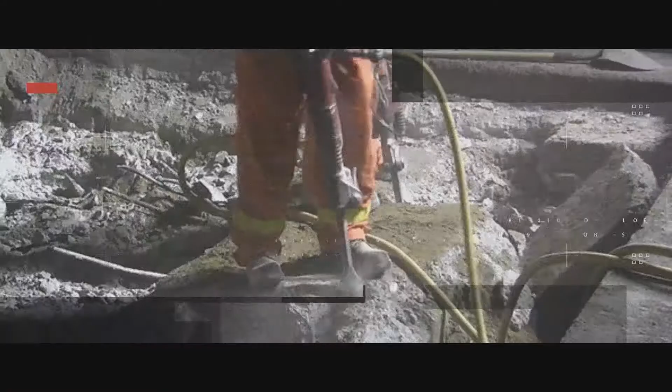But what are these frustrations? We will show you in the next video, which we will play and I will comment. Diamond coring, if we look at the coring express, is one of the most dangerous machines in the world. If the clutch fails, we face serious injuries by the user, kicking off a ladder, for example, or even worse. When we look at demolition hammers, we know the hassle of cords, the hassle of hoses. Guys have to maneuver 30 kilos of weight and sometimes even petrol. This brings us to the next point, petrol engines, a lot of parts, sometimes hard to start due to weather conditions. And then, if this is not enough, fuel storage, fuel transportation, fuel handling, having the right mix, and then at the end, the emission.

What you see here in this video was original footage from research this team did, and we really try to tackle these kinds of frustrations with a new breakthrough technology and bring it to you into these markets. In order to bring you closer to what zero emission means and how we solve other issues as well, I want to hand back to Claude, who tells you more about zero emission and what it means in total.

Thank you, Thorsten, for giving us hints, showing us the problems and issues we face today on site. We will go now together into our zero emission story. Of course, zero emission is a lot about fumes out of petrol engines, and it is a story about the environment. But when we speak about fumes, it is also a story about health. And health brings us to safety on site. MX Fuel, the zero emission story, is also a story of productivity and economic values. Here we will go a little bit deeper.

When we speak about zero emission, we need to speak about the fumes out of the exhaust. One story is definitely the particulate matter, SOx, NOx, and other substances. Here we hear a lot about legal issues, how regulations will change. Even here in Germany, they speak about a speed limit on our motorway. Guys, could you imagine a speed limit on the German motorway? This is one part of the story, but we also need to speak about carbon dioxide, the main reason for global warming. And here MX Fuel gives us a lot of opportunities to save carbon dioxide on site.

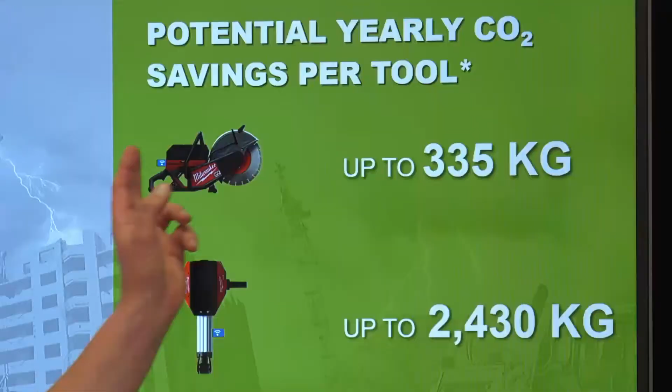The first example is our MX Fuel cut-off saw. Here we can save up to 335 kilograms of carbon dioxide per tool and year. Guys, again, per tool and year. From research, we know most companies use much more than one tool, they use 20, 25 tools within one company, so the potential savings here is really huge. On the other hand, with the breaker we can save up to 2.5 tons of carbon dioxide, again per tool and year.

The question very often is, how much is this in comparison to something we know? So we compared it with the average white van, the typical truck a craftsman here in Europe uses. We asked them during our research how many kilometers they drive over the year, and the answer was approximately 10,000, which brings a carbon dioxide footprint of 1.7 tons. So you can see, even with light building equipment, the saving potential is really huge. The reason is clear: here we use small engines, two-stroke engines, and they don't burn perfectly. This brings us directly to the health topic.

When we speak about fumes and health, there are two substances we need to understand. One is benzene. Benzene is first of all an alcohol, and it reacts in my body like every alcohol. I breathe it in, it goes in the blood, and I get a little bit drunken. And of course, I lose the fear of risks. This is the moment when accidents could happen. And on top, benzene could cause cancer, for example leukemia and other diseases.

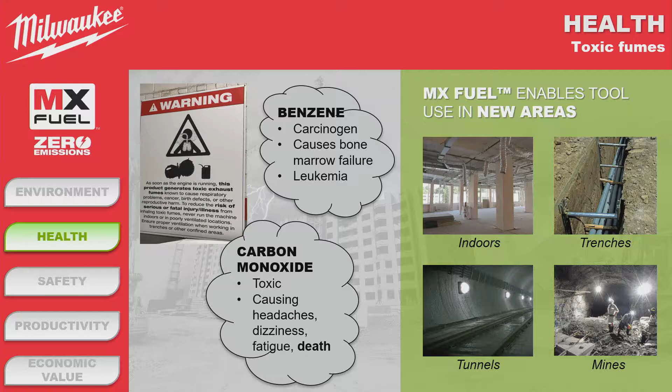The other one we need to speak about is carbon monoxide. Carbon monoxide is definitely a huge problem on site. The reason is quite simple: yes, it is toxic, but it is also heavier than air, and it could fill a room or a trench really easily. And when it goes over the nose and there's no oxygen left, the risk starts. I get a little bit of headache, get a little bit dizzy, and in the worst case it could end in a sudden death. This is the reason why we can't use petrol tools indoors or in trenches.

Here, guys, MX Fuel gives us a lot of new opportunities where we can use the tools. For example, we can easily work indoors. On research in trenches, we saw people building exhausts out of the trench. Here with MX Fuel, no job on top, just cut, job done. We can use it in tunnels or mines without any issues. Guess this is the big benefit of using MX Fuel.

Going a bit further into the health and safety aspect, we need to speak about tool safety. Here we have two topics we need to understand. One is the hand-arm syndrome or the white finger syndrome caused by vibrating tools, because they block the blood flow in the fingers, my fingers could get stuck and I couldn't hold the tool anymore. This is a huge risk. For this reason there's a limit line, and the limit here in Europe is 5 meters per square second per working day that a worker should use the tool. This is the reason why we reduced the vibrations as hard as we can.

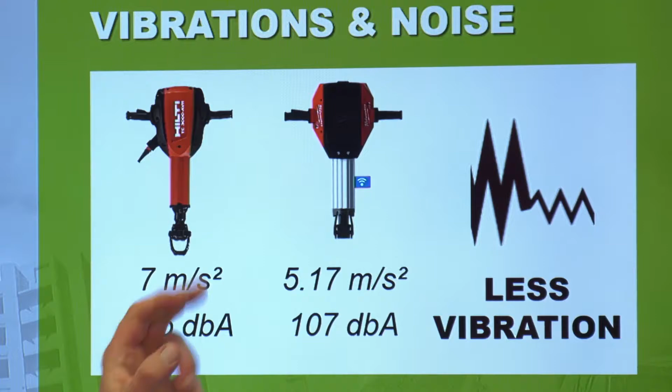When we compare, for example, with the Hilti TE 3000, which is definitely the most common breaker here in Europe, it comes with a vibrating level of 7 meters per square second. In comparison, our MX Fuel breaker comes only to 5.17 meters per square second. To give you an idea for the daily usage, the Hilti I can use for approximately 5.5 hours. Our MX Fuel breaker I can use the whole day without any risk for the user. We need 2 coffee breaks and we fulfill all the regulations.

This brings us direct to the noise level. We all know noise causes stress, and stress could cause a lot of other diseases. This is the reason why we worked really hard on the noise level on our machines.

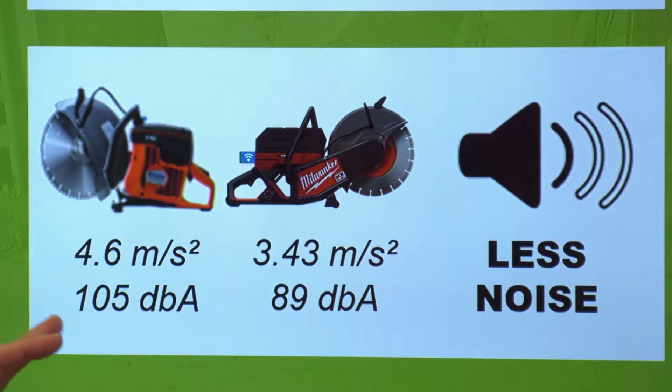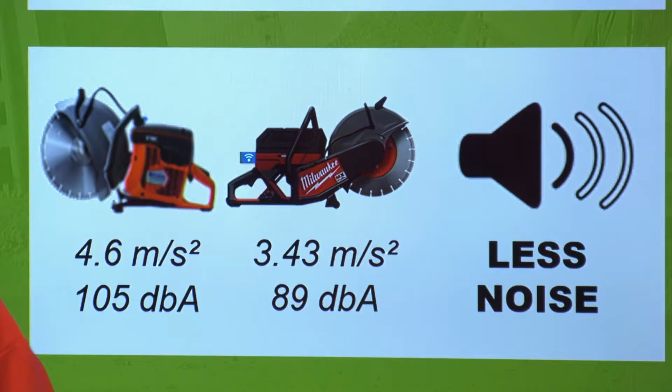Here I have a comparison against a Husqvarna. We use here a Husqvarna petrol cut-off saw. It comes to a noise level of 105 dBA. In comparison, our MX Fuel cut-off saw goes down to 89 dBA. Now you can ask, how much is this? To give you an idea, 105 dBA is the noise level of a starting aeroplane. In comparison, 89 is the noise level of a passing truck. So it is a huge difference. From a technical point of view, an increase of only 10 decibel, we hear as a double of the sound. So we can say a decrease of 16 decibel again is a really huge number.

This guides us now direct to the productivity. For the productivity story, we have here a video ready for you.

This brings us now to the economic value. We know all petrol tools produce a lot of ongoing costs. We need petrol filters, air filters, a lot of other spare parts. This is one part of the running costs on a petrol tool. The other part is definitely the consumption of petrol.

For us, when we compare with our MX Fuel tools, this means per cut-off saw, per MX Fuel cut-off saw, we could save up to 240 euros per year in petrol costs. And for the breaker, it's unbelievable: 1,700 euros in petrol costs we can save.

I think it was a little bit of theory, and I think it's time to see the tools in action. I hand over to Thorsten, and we start with the diamond core drill. Thank you, Claude, very much. Thank you for the introduction.

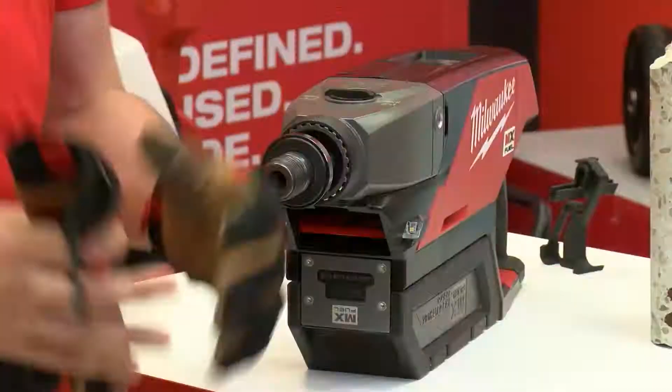So you see there's a lot of savings. Zero emission doesn't only mean petrol, but let's start with the tool. I have already one glove on, and we want to get our hands dirty, and we'll start with the diamond core drill. But I think the question on top of your mind right now is, can it really perform as well as the usual tool? That's why we prepared another video, so let's look at the tool comparison of the diamond core drill.

You will see here Klaus, one of our trainers, operating the direct competition, the Hilti DD150. Both machines have the same performance and can be used in the stand like here, or even freehand. We equip both tools with the same core, so there's no difference, and we start drilling at the same time.

One difference you'll notice is on the left-hand side from me, you see already our M18 backpack sprayer. So we use the synergy of the whole Milwaukee range, using this backpack sprayer, setting it on level 2 of 5, and I don't need to vary the water flow. Conventional machines like Klaus is using have mostly a hand-operated pump, so you need to pump to 3 bars and watch the water flow.

I talked a lot in the meantime, I hope you paid attention to the video, because you'll see there is still no difference in how fast we drill. So at 102 millimeters, we prove it: Milwaukee was able again to cut the cord and bring corded performance to a cordless platform.

What we'll see in a second, letting the guys drill for a little bit, is one feature that happens pretty often on job sites, which we managed to prevent in this moment where Klaus' core gets stuck. But this I'll explain in the safety feature.

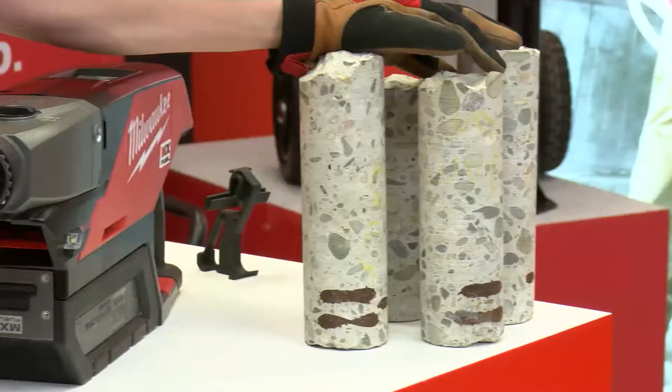Back to the studio, and another example on performance, because you'll have the question: how much can we do on one charge? So basically what we set up here are 4 cores we did in C55 basement concrete of a 7-year-old hotel, because they wanted a pool and invited us for test drilling. Looking at this core, you'll also see we have 4 meshes of rebar in it: 7.6 millimeter diameter, 24 centimeters of drilling depth on one battery charge.

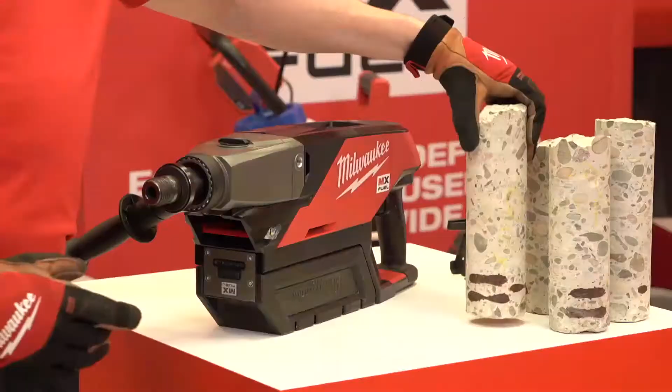We did this coring just repositioning the stand and cored at the same place, so the user needs to reposition the stand. This took us 45 minutes. The charging time of the little battery of our CP pack is 45 minutes. So even when it comes to performance, the user will not miss out.

Another point we heard is productivity. There Claude did a very good example with me failing to refuel the cutoff saw, but we have a better example here, and I have a chance to win this one.

In the next video, we'll show you how we compare the setup of a diamond core drill. We again have Klaus and me with the same setup of machines, comparing direct competition. We already placed the anchor, which would normally be an SDS Plus job. Both of us can set up the stand in the same time and start the job. Here we don't see a big difference; both have the same setup time, both need to bring the stand into position. This is currently the same timing for both of us.

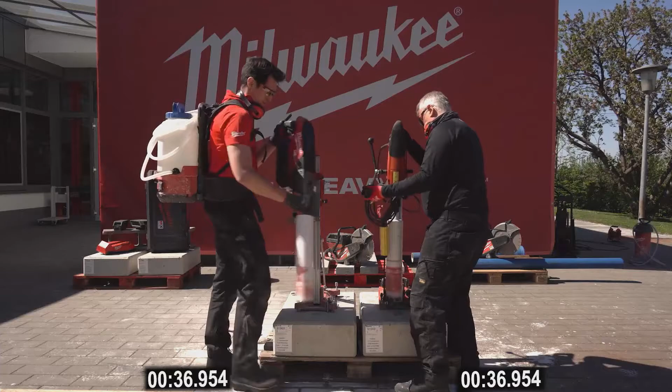It will get interesting the moment we bring the tools into position. Here, Hilti has a clamp mechanism where you slide in the machine and you need to lock it. We use a 60mm collar lock, a quick lock system. Our machine also has a 60mm neck, so it fits this stand as well as other stands. I have just one bolt I need to tighten, and that's how I fix the whole machine to the stand. So there are no additional tools needed to get this tool into position.

And that's exactly where we now see the difference. Using the Milwaukee synergies, I have the M18 backpack sprayer. I bring it into position. I already put it on gear 2 because then I have a nice milky consistency of the material I wash out. Switch the backpack sprayer on, then switch on the tool, wait until it comes to life, switch it on, switch the water supply on, and I can basically already start drilling.

Klaus, on the other side, is still in the setup phase. He's not there yet to drill. He needs to get the traditional hand pump up to 3 bars to have a good water flow for the process, as well as maximum lifetime of machine and tool. But then he's still not finished, because the moment he locks the tank and is ready with one part, he still needs to get the power source to the machine.

And basically that's the moment where we go back to the studio, and we can say: until the moment Klaus comes back with the power source, plugs it in, tests the FI switch, I'm already done with a 24 centimeter drilling, coring job, and I can continue to the next job.

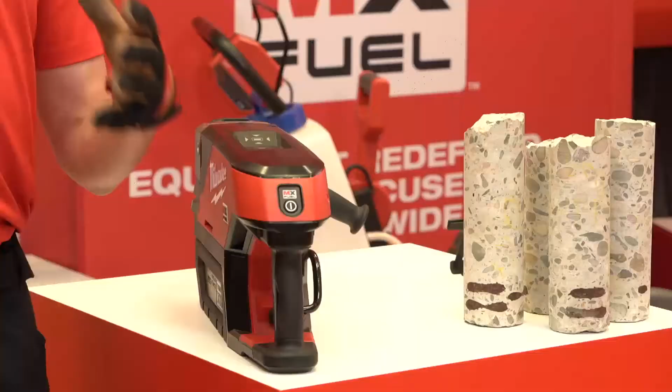If you look at coring specialists in EMEA, this is exactly the time saving these guys want to have, because sometimes they have 1 or 2 holes on one job site and need to move on to the next one. Here, up to 152 millimeters we can core with this machine, and this will enable coring specialists to save a lot of money because they are faster from job to job and get more jobs done.

So to the tool here on my side, I will say some initial words about MX Fuel. We talk about light equipment, we talk about a new category, and basically what we see here is we need to start all the tools. So the first safety feature we will have on every MX tool is they need to be started and armed to get the job done.

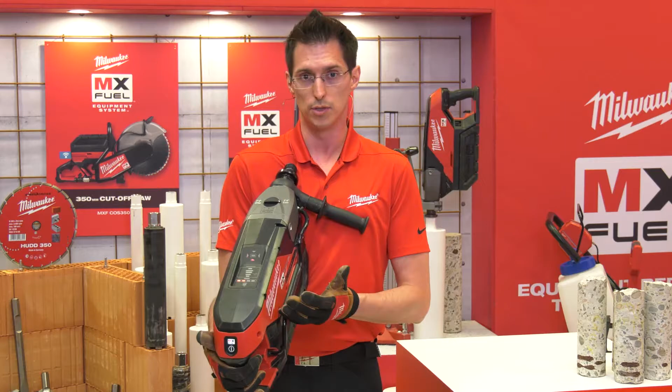So when we switch this tool on, we will see it comes to life like any other cordless tool, and what I want to take you through is the speciality of the core drill: this little cockpit we have on the backside. On the bottom, you see the 1-key light blinking, so we can track and manage all MX Fuel tools and even the big battery. They are all 1-key enabled because we really see this as an asset, and you can track and manage the position. The light, which comes later in the year, will also be able to be customized.

The next one blinking here is the battery gauge, because when you fix the tool in the stand, you want to know if you can do the job, if you can finish the coring - that's the moment where you use this battery gauge, not the one in front of the battery, so you have easy visibility of: can I get the next job done? We also see here a pressure gauge, so we prepared a video I'll show you in a minute.

So we go over to this digital level. This is a feature which is only there with Milwaukee. If I drill horizontally, this digital level will guide me to have the perfectly straight hole. So here I have an easy indication for the user to get a perfect straight hole, and you can put aside chisel and hammer to adjust it.

I talked about the pressure gauge, and that's where we prepared a video - we go back into this competition we saw before between Klaus and me. For those wondering why we really had the competition and I was staring at the machine: I was looking at the cockpit and from the cockpit downwards on the core. So basically what we see here is a pressure gauge, which gives me the perfect indication if I need to put more pressure or release some pressure in case I hit a rebar or have other resistance in the material. So here I have an improved lifetime of the tool and the accessory by using it properly and getting the most out of the lifetime there. This is an improvement you will find from Milwaukee only.

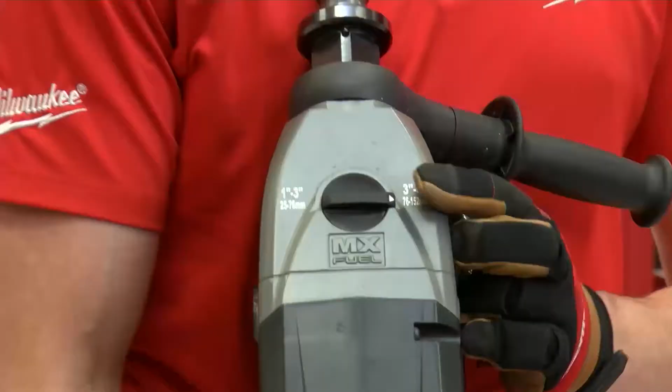What we also have on this tool is something to make coring easier for people who aren't used to it. We know plumbers and electricians need to core, but they give it to a specialist because they think there's rocket science behind it. So instead of putting gear 1, gear 2, we used the casing and laser engraved the diameters directly on it, in imperial and metric, showing the traditional diameters. You don't need to go back to the manual to figure out which gear is for which diameter.

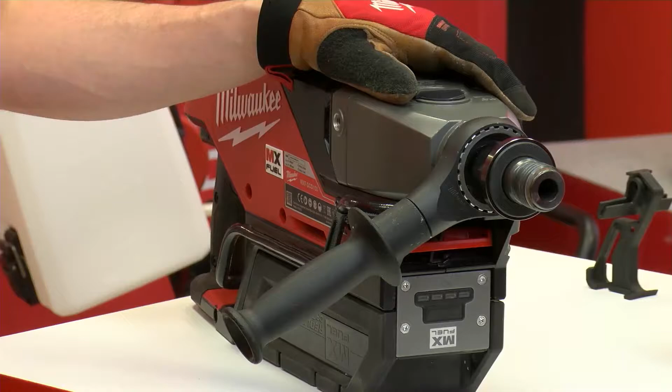Speaking of diameter, we got the question: what is the reception? We have a 1¼ inch reception outside and a 1/2 inch reception inside. So it's a standard reception, and we can use traditional cores which have this reception as well. Nothing special, we keep you going with what you have.

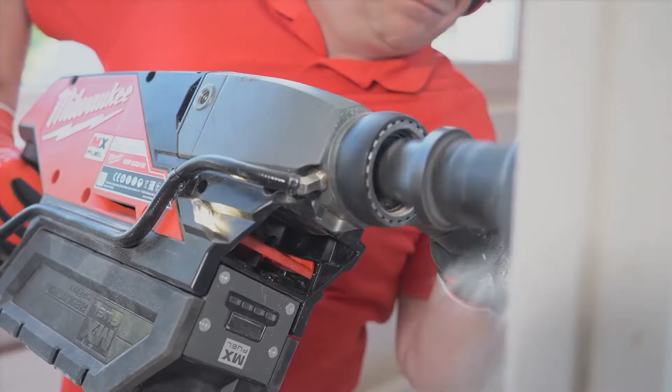Looking at the tool from another perspective, we want to show you safety features, because coring is a big frustration around safety. So what did we do different? First, the industrial standard requires a mechanical clutch in this tool. Here we go an extra mile: we move away from the sliding clutch to a ratcheting clutch, because the benefit of a ratchet is more points where it engages. In a moment you'll see how the clutch engages. There we go—now we have a look inside the casing at the ratcheting clutch mechanism.

What is the difference versus the sliding clutch? With the ratcheting clutch, the user isn't fighting with the machine. The user can still adjust and maneuver it, and gets feedback from the machine. Especially when drilling in hollow blocks or red bricks, you have chambers where the core can get stuck, but in that moment this ratcheting clutch gives you feedback and the user can adjust.

But we wouldn't be Milwaukee if we didn't go the extra mile for our users when we promise safety. So we introduced with our SDS Max the auto stop function, and with this diamond core we go one level higher. Let's look at the next video to see how auto stop works.

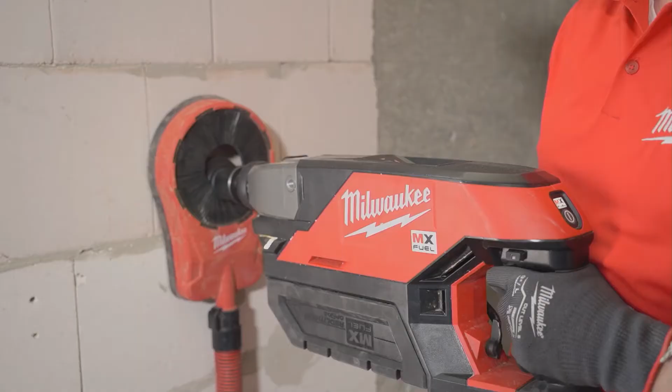We have a gyro sensor that activates the moment something gets stuck in the front. You'll see the engaging light blink to indicate that's the moment the clutch adjusts or kicks in. A maximum degree of 15 degrees is what you'll experience as a user. So imagine you're standing on a ladder drilling—this is the moment where auto stop has your back.

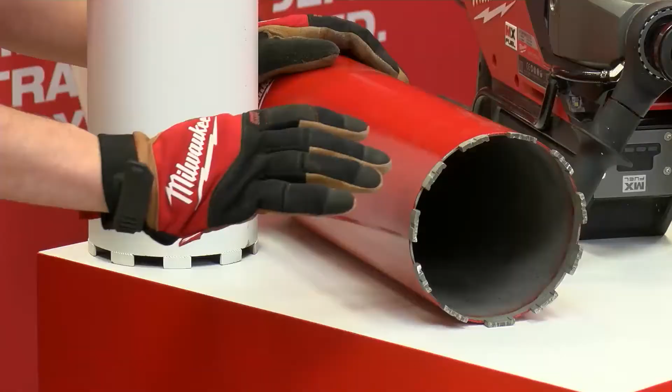We know that a tool, especially cordless tools, performs best with the right accessory. We have our standard cores which you can use without a problem. But if you want the best performance out of your tool, we're launching a new range of white cores specially made for cordless.

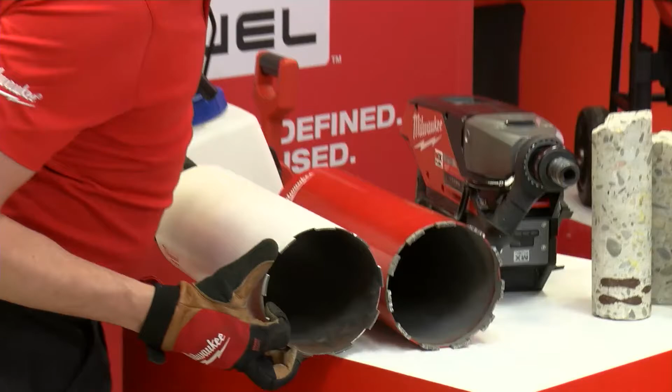Why? We'll show you together with the camera team. If we go closer here, we'll see the segment itself is thinner. The diamond segment uses rougher material and rougher diamonds, so we get the same lifetime, but the material got thinner, and the steel body also got a bit thinner. So there's less resistance for the core, and we get the max lifetime out of the coring machine.

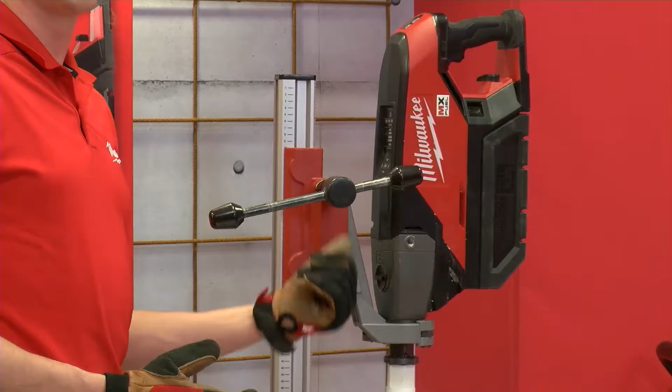Behind me you see the stand we will launch with this tool. We'll come with an insulated handle stand, very easy to set up. Again, a 60 millimeter collar, so we can fit competitive machines as well as ours, or fit our machine to any other 60 millimeter holder. I can also use it with a vacuum pump or an anchoring kit, so it's directly available for every user what he needs, with our heavy duty competence behind it.

In that sense, I think we covered the first tool—or are there more questions I didn't see? One important one: how many holes can we drill per battery charge?

That's what we built up here. It's basically C55 concrete, very tough material. We have a 76 millimeter core here, and this was done with reinforced concrete before this question comes up—we did 4 holes in 45 minutes, which is exactly the charging time from the small battery.

But now I think back to you and the cutoff saw. Back to the most expected tool in the training, I'm sure.

Yeah, guys, welcome back. We go direct into the world's first 350 millimeter battery-driven cutoff saw, which gives us the full experience of a petrol tool. We have the full cutting depth of 125 millimeters.

But guys, let's think a little bit about petrol again. If I use petrol on site, I need a dedicated area to store it. I need to mix for my 2-stroke engine, petrol and oil, and if I don't mix correctly, I can easily break the engine. Then comes, for me, the most annoying part: starting the tool. When it's cold, it is really hard to start.

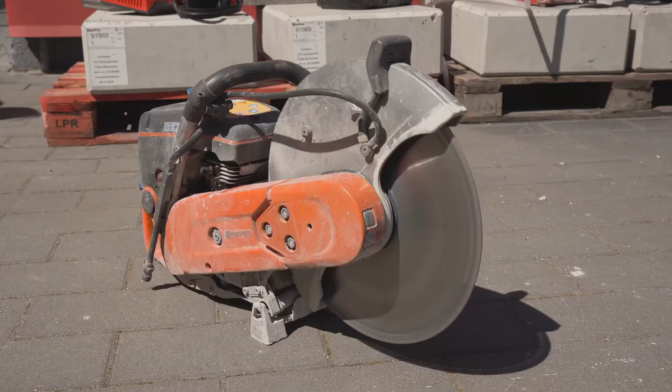As soon as the tool runs, here we go direct into the next video, we see the tool idling on the floor. We can see the running tool, how it starts moving on the ground. Think a little bit: here on the ground it doesn't matter, but what happens if we work up on a scaffold and the tool crashes down? In the best case, the tool breaks. In the worst case, one of my colleagues is passing by. This is the moment where we stop thinking about what could happen.

Yeah, guys, this brings us now to the most important question. What's about power? How powerful is the MX Fuel cut-off saw in comparison to petrol? Here we have the next video.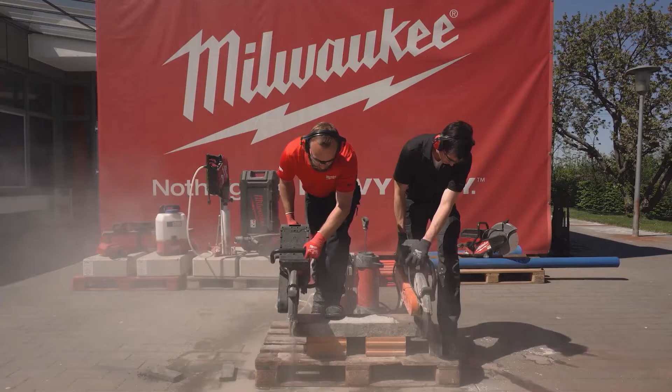We see again Thorsten and Manuel. Thorsten uses here a Husqvarna petrol tool, and Manuel is working with the MX Fuel tool. They both work on the same curbstone, starting at the same time, and I would bet they finish at exactly the same time. It is virtually the same time, so we can say the power is definitely 100% the same as we know it from our petrol tools.

But guys, power, what's about runtime? This is exactly the curbstone we have seen cutting in the video, and on this curbstone we do easily 24 cuts per charge. But we all know a cut-off saw is also used on metal, so here's another example: a 100 millimeter steel pipe. In this steel pipe we do up to 22 cuts.

The third example comes from civil engineering, a freshwater pipe. We see here an inner core of concrete and an outer core of steel cast, definitely one of the hardest materials to cut. Even in this pipe with 100 millimeter diameter, we do 13 cuts per battery charge. So we can say, for all three examples, with one battery we do enough for a full working day.

This brings us now to the next question. I promised you we will speak about productivity, and here we have the next video.

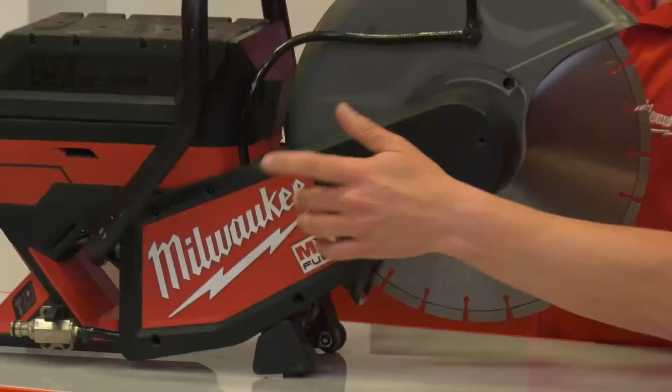Yeah, guys, let's go a little deeper into the saw. Again, it is the feeling of a petrol saw. Important first of all is the safety guard in front, easy to adjust exactly to my daily needs. Going a little closer with the camera, we see here also the cover of the belt drive - so our battery saw is belt driven like we know it from petrol. We see 4 screws on the cover, easy to open, and we can tighten the belt again, or maybe once a year I need to change the belt.

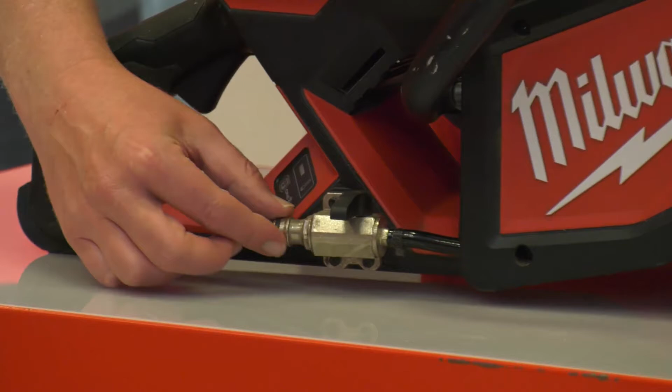Going further on the saw, we see here a quick water connection, a simple water connection - just click it on, job done. Behind the water connection we see directly the display for ONE-KEY. Going a little on top of the saw, in the back, we remember from Thorsten's pitch, we have the on-off switch.

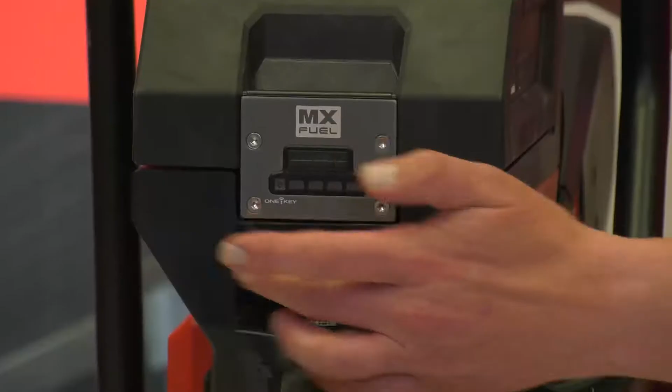Every MX Fuel tool, we need to switch on, switch off, and directly above we see the fuel indicator for the battery. And checking the front, it came as a bit of surprise when I was doing research with the tool. One of the most common comments from end users was about tool storage for the disc change or tightening of the belt. Both tools are stored directly on the tool, and this was something everyone recommended, saying this is something we've never seen before on petrol tools. All suppliers of petrol tools, Husqvarna, Stihl, whoever, always supply a bag with the tools in it, and we all know this bag ends up everywhere but beside the tool. So yeah, a small but important benefit here.

This brings us, last but not least, to the front, and we see the arbor for the disc here. It is, again, a standard chuck, pretty much the same as our competitors use, but we are Milwaukee, we make everything a little bit better. We have here a 2-disc system, so we can use both common discs, 25.4 millimeter and 30 millimeter hole, so every disc in the market fits on the tool. This is a quick one about the tool, but we know a perfect match always means the best tool needs the best accessory.

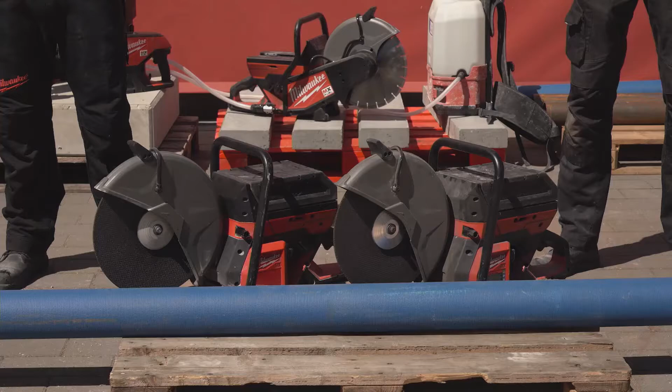I would say this is the moment for our next video. Again we see Thorsten and Manuel, and now we see similar saws, both using a MX Fuel cutoff saw, ready to use, both come with bonded discs. The pipe we use here, you remember the blue color, is ductile pipe with concrete and steel cast from civil engineering. We can see both start side by side, and we can directly see Manuel is much faster than Thorsten. Maybe Thorsten was a bit tired, could be one reason, or Manuel has more experience, could be another reason, but I don't think these are the real reasons. I think Thorsten is always motivated to win a race - I try, I give my best.

So the question now is, and you can see it's a huge difference, what is the difference? Here I think we can leave the video, go back to the studio, and I have the two discs here. On first view, they look 100% the same, but the big difference is Thorsten used the metal disc, while Manuel's cut-off saw had the ductile disc.

You can see the correct disc makes a huge difference. On one hand, of course, in performance I finish the job faster, but on the other hand, it's important to remember I get more runtime out of the battery. This is one of the reasons why we speak about a perfect match between battery and accessory.

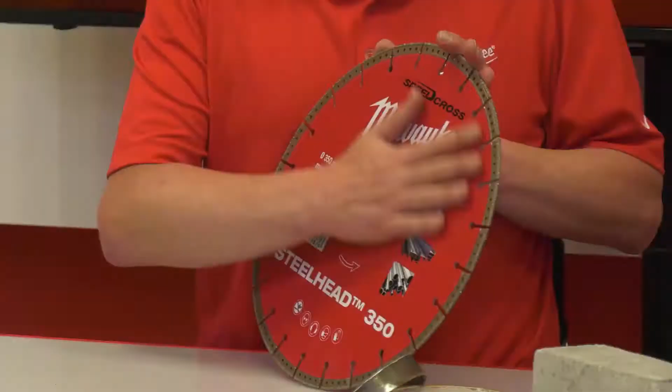Going a little deeper into the Steelhead, important here is we use a milled surface on both sides, so we have a perfect run through the material without developing too much sound, and less friction for a longer runtime of the battery. We see the holes and slots outside of the disc - this is always important when the disc heats up, so it can expand a little without producing a heavy sound. And we use a perfect amount of diamonds on the border for a fast and efficient cut.

But guys, I'm sure we all agree, diamond discs in metal is just one part of the story for diamond discs. We also need to speak about discs we use in masonry and concrete, and here I will hand over to Thorsten again.

Thank you, Claude. So concrete, one of my specialities, and I want to take you through the accessories we launch with the machine. We want to deliver to you like the perfect system. So basically, when you buy this machine, you will get it with one battery, one charger, and the first black disc here, the DUH, Diamond Universal Hard Material Disc. So you have a plug-and-play solution where you can go into any hard material, any abrasive material.

You have a multi-material disc in that sense. But we know a lot of users, depending on their application, have very dedicated and special blades. That's why we have the Speedcross range.

The one in the middle here for stone material is the AUDD, the abrasive universal diamond disc. This is for very abrasive materials, like the red stones and white stones behind me, and all these kinds of materials which are very hard on any diamond segment.

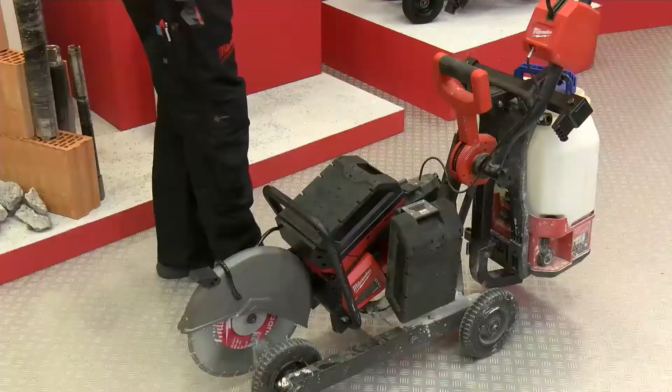This is from the accessory range. We have a whole range of tools and accessories, 6 of them, but we also have system attachments. What we see here directly in front of me is a cut-off saw cart.

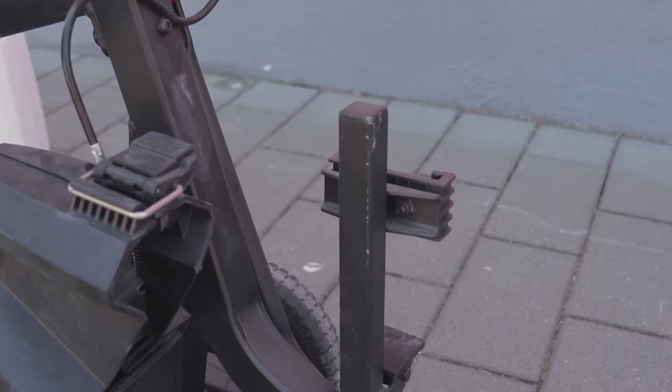And how you set up this cut-off saw cart, we prepared a video to show you the exact details. Looking in the video, what you will see - runtime is one question. So we have the second battery storage here, so we can do up to 3-meter cuts and even longer.

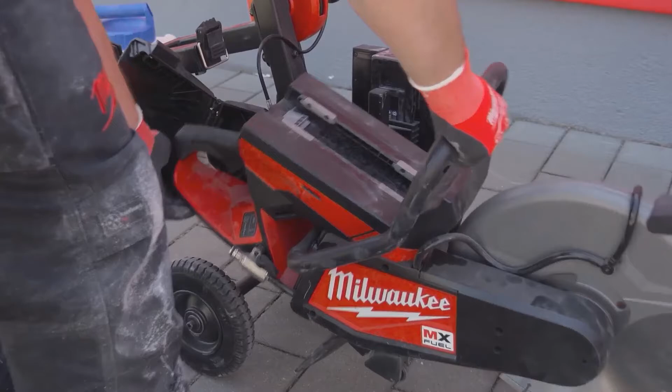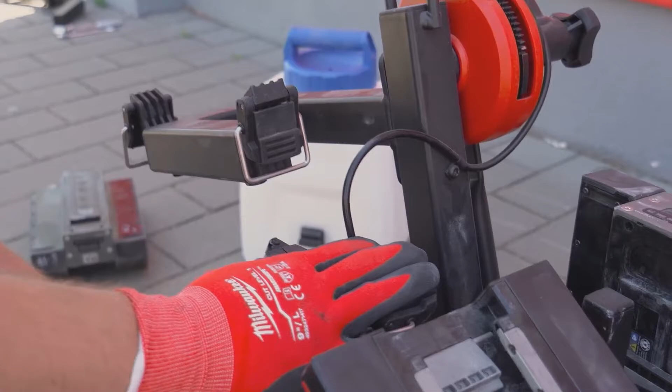To fit the tool, I just unleash these two latches, it folds open, I grab the tool and place it inside. It's made for our tool, our handle, so no competitive machine fits in there. Again, we just close this holder, close the two latches - there are no additional bolts, so a very quick and easy solution for how you bring the tool in there.

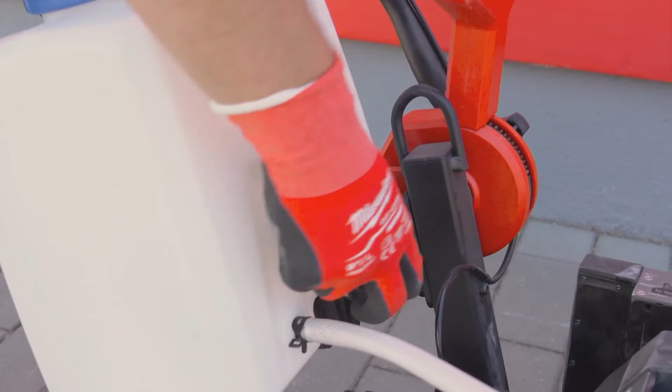Safety first, the battery was not on, so now we slide the second battery onto the tool itself and fix the water tank. This water tank is in the delivery content - a gravity water tank with 11 liters, also two latches, click it on, and it's good to go.

In order to start it, we now start the tool - it starts, goes on, is armed, then we connect the water connection because we want water flow for cutting. Open the water valve, and then it's like a lawnmower, you guys know - press one button, push the handle, and you're good to go.

In order to dive into the material, use this little red handle, grab it, put it down, and then you can already plunge into the material. You will always have the full plunge capacity, blade capacity of 125 millimeters cutting depth.

What you will also find in your delivery content is this little black metal piece. This is to enable you to use our backpack sprayer. So what you see here in the setup in front of me is already equipped with the backpack sprayer.

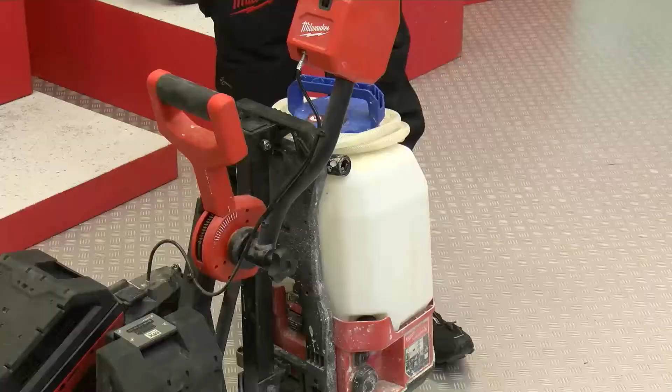Here we already had the question - there are 5 gears. We recommend gear 2 to use the right pressure for these applications. You plug it in and you have 15 liters and a constant water flow, not like a gravity tank where the less water, the less pressure. So here we have a perfect solution with this clamp already embedded.

That's the closing words for the cutoff saw and the system attachments. The cutoff saw cart is separately available for those who need it for extreme precise long cuts. Let's go to the last tool.

Let's talk about demolition hammers. So we get rid of the cart a little bit, and we prepared a video to show you the issues and frustrations we face with demolition hammers.

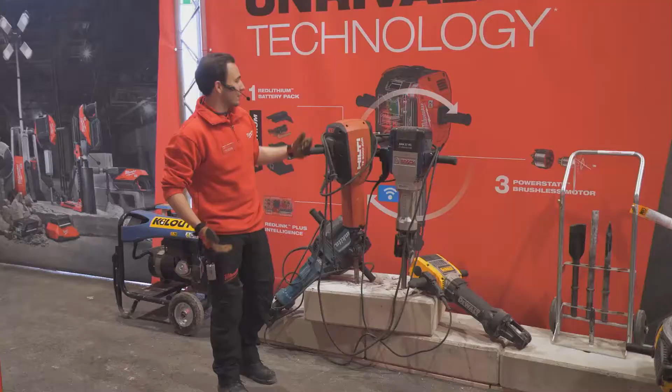So when we look at the normal hammers, the first thing is pneumatic hammers, and there is the starting of a tool - we have the noise level, the exhaust, and a lot of setup with this generator. Petrol hammers like this one have the exhaust pipe directly in your face. So basically, you will always have the issue with the petrol solution.

When we look at corded hammers, you have the problem of bringing the cord into position, placing the cord, and finding a power source. Tripping breakers is a big topic because you're not the only hammer running on a job site - if there's another tool plugged in, it can happen that your electronic hammer doesn't deliver the performance it used to, because there's something else plugged in. So this is all the frustration we face, beside cables, tripping hazards, etc.

And how does the solution look like?

We prepared a performance comparison here because we want to show you that the cordless hammer can bring the same performance as the corded hammer. Let's watch this movie and see what we did in front of the training center.

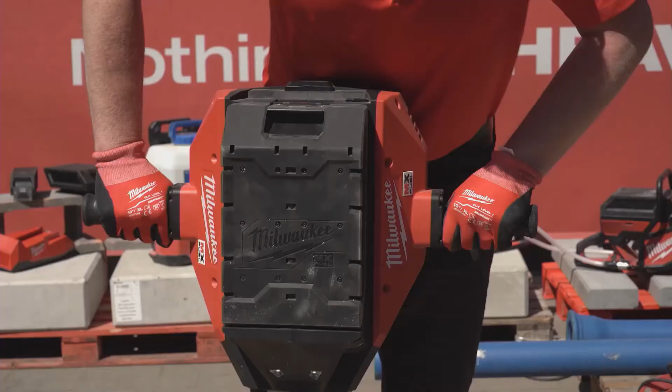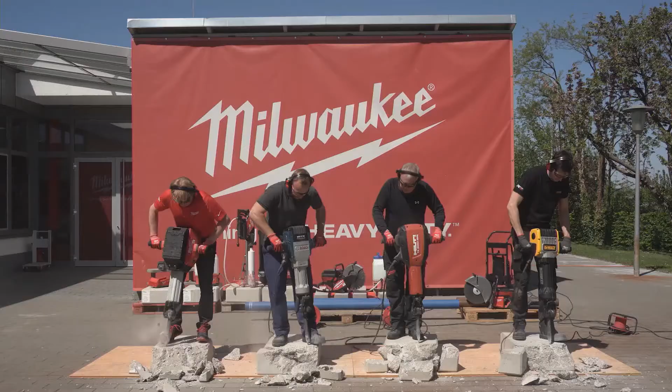We have here the setup of the main competitors. We have Claude operating the demolition hammer, he wants to be part of our races and win one time. Then we have our Bosch hammer operated by Manuel, and then the DeWalt hammer which I was operating. And then the last one in the middle, the most experienced, market leader, the Hilti TE3000.

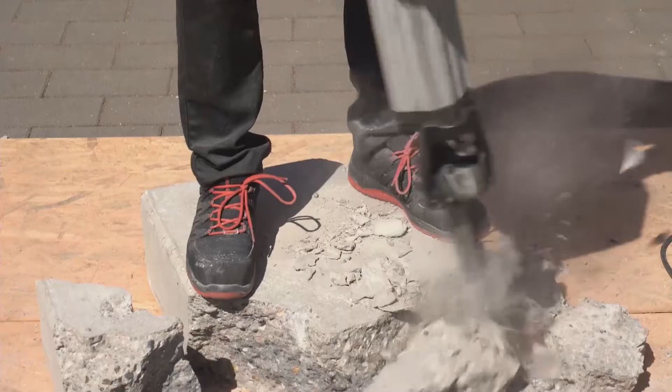Everybody starts chiseling at the same time. Using 64 joules of power, 1,300 beats per minute, we can really keep up even with the market leader and deliver a performance which will not let the end user miss the cord. With this demolition hammer you can break up to 2 tons of concrete on one XC battery charge. You see big bricks coming off, Claude is winning the race, and we will have a solution suitable for the user's needs.

In that sense, performance is one thing we need to talk about. Performance literally is also the subject of the next video.

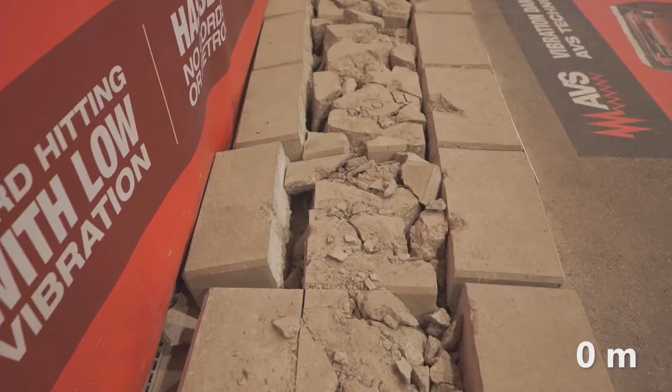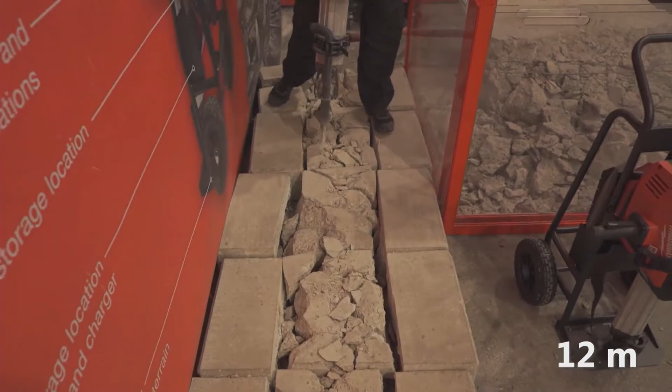What we want to show you is from Monaco. We had a trench built, 30 centimeters wide, 20 centimeters deep, and this is all on one battery charge. This is a typical plumbing and electrical application, up to 12 meters we did on one XC battery.

So when we look at performance and runtime, we have what the user needs on the job site, and he will not miss the cordless tool. He can use it inside, he can use it wherever he wants. He has a solution different than anything he found before. Looking at the demolition hammers, we also save setup times, etc.

This isn't a big point of discussion, but let's look now into the tool. We have the tool here in front of me on the trolley. What we see is a starting button on top with the one-key light. This one-key light will also engage a yellow blinking light after 80 hours of trigger time.

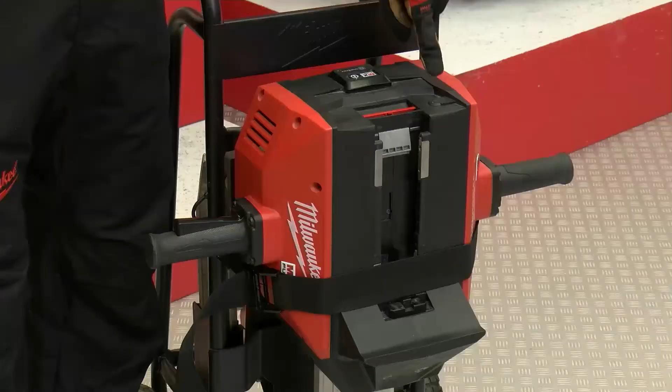80 hours of trigger time is the reason why you need to re-grease the machine. We enable you to do the greasing on your own to make sure you always have the right performance of your tool when you need it. What you see here is already set up with the trolley together, the demolition hammer. But what we want to highlight is the stretch band, so you can store it with the battery on the tool, or as it is here, without the battery.

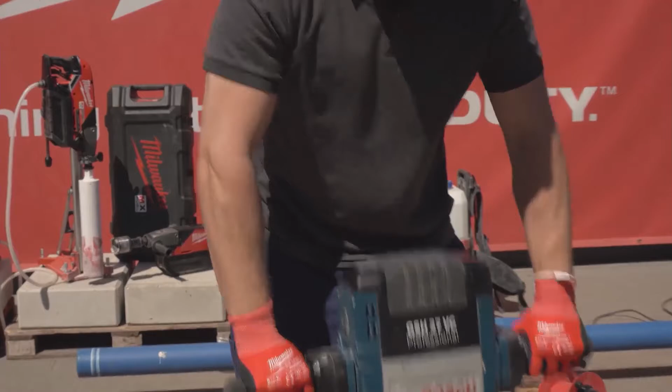Another point we need to mention is vibration. We want to show you how we chase vibration with a video about the competition tools. What you see here is basically that the competition has the handles as an anti-vibration mechanism, so these users have the issue of their hands vibrating.

Watch their arms, watch how the vibration is passed to the user. Imagine this hammer falling down one time and hitting the handle. On the other side, Claude has no issue with this because the mechanism is different. How does the mechanism in the Milwaukee case work?

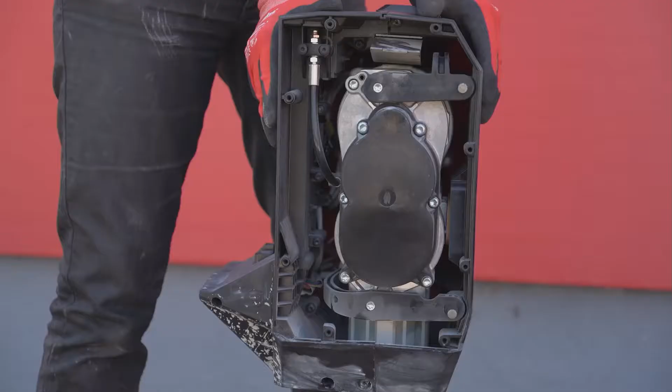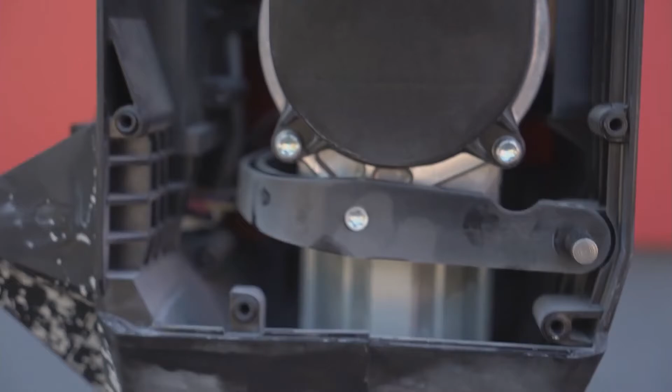There we have another video. We open the housing to show you the mechanism. When we go into the machine, we see two swiveling arms. The engine is totally disconnected from the user, from the housing, and on top we have a spring. This brings us 5.17 meters per square second, and also enables the two coffee breaks Claude was talking about, and a full working day with this tool.

And we wouldn't be Milwaukee if we didn't dig deep with the user, have discussions, speak to them, and we heard transportation is one issue - transportation of the tool itself, not the trolley. So what did we do differently?

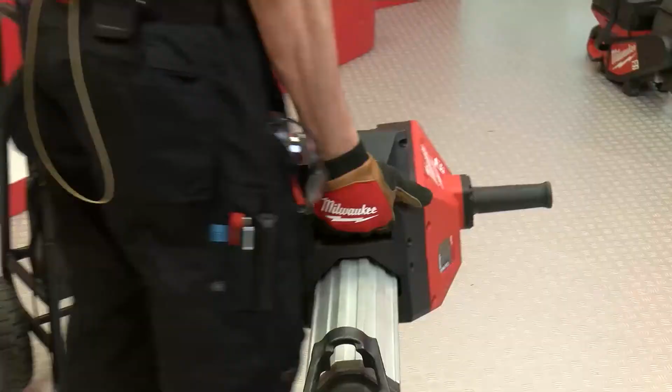I'll take this body out. We have the handle embedded and placed so we can perfectly carry this hammer in balance. So if I need to go up staircases or carry it on the job site, I have a perfect solution, a well-balanced hammer, and get the job done. No cord to drag over my shoulder or around the tool, or to trip over. Here we have a clean solution.

Here we have something which is different to anything you find in the market. I dropped this bad boy down. Let's have a look at a system attachment.

So what we have standing here is our trolley. The main features are happening on the back. When we talk about transportation, we have the big wheels, which we already used in the experience of pack out, so we have perfect wheels to get it up and down stairs, into the trailer, off the trailer, be mobile, even in rough terrain.

If you need to slide it down from certain areas, we have here these two sliding handles. We have really smooth transportation, so we can slide it down certain areas from a pickup truck or even from staircases if we need to.

And then we see directly the only corded tool of the MX Fuel range, which is our charger, where the cord is safely stored, and it is a second battery storage. So even if I need more runtime, if I have 24 meters of trench, I can store a second battery on the tool itself.

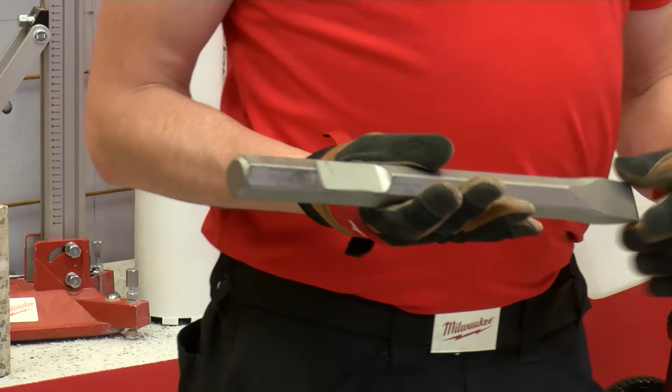No tool is operating without accessory, so we have 4 slots for 4 different chisels. Here the user will have the option to use our Milwaukee chisels. It's a standard 28 millimeter hex reception, so it fits any competition machine. If you have 28 millimeter hex chisels with a ring, we've got you covered, the tool can also receive this kind of chisel. Made in Germany, we offer you a whole range of chisels, built up here behind me.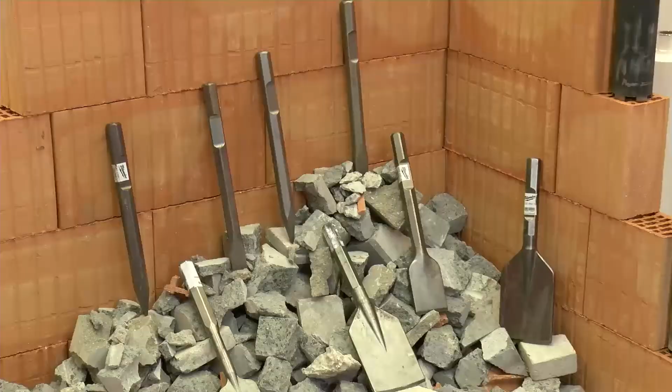Additionally, we also have tamping plates. So here we bring you the performance, the lifetime you expect from this tool, and make your work on the job site way easier, because we are Milwaukee, we are out there with you as a user, and we care about your problems.

There's just one question left open we really need to discuss, a deep dive into how we deliver the performance. How do we get there that a cordless tool is performing as well as petrol competition, corded competition, and even pneumatic competition? So Claude, back to you, show us the insights.

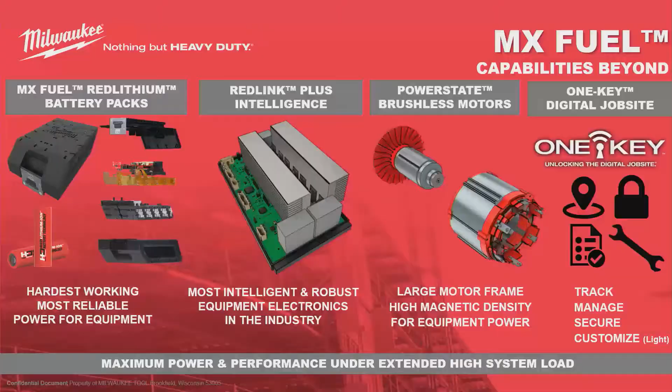Yeah guys, let us go a little bit inside the technology of our MX Fuel tools. Here definitely we need to speak about our REDLITHIUM battery. For the battery on MX Fuel we use our brand new 21700 cell. Two benefits to remember on these cells: it works down to minus 28 degrees Celsius, so we can use it even in the far north of Europe, and very important for MX Fuel, it has a really low cell impedance.

This means there's a really low resistance inside the cell, so it could deliver really high currents, exactly the currents we need for our MX Fuel tools.

All the cells we use here we connect serial within one frame, and I think this is something we know already from our M18 packs, an extra inner frame for the cells. So in case the battery crashes down, it is absolutely durable and will last a long time.

This is the 3 amp pack with 216 watt hours, and we come now to the 6 amp packs. Here we can calculate together 216, 432 watt hours on our big pack, which produces, by the way, similar power to petrol of 5 horsepower.

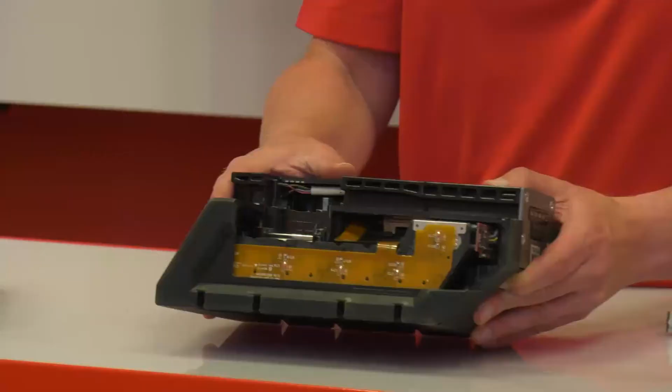We connect two of these inner layers together, both go now in the outer housing, which we can see here, again a really durable housing for harsh job site conditions. And as we know it from Milwaukee, again a large rubber overmolding, so it doesn't slip away even on fragile surfaces like my table here.

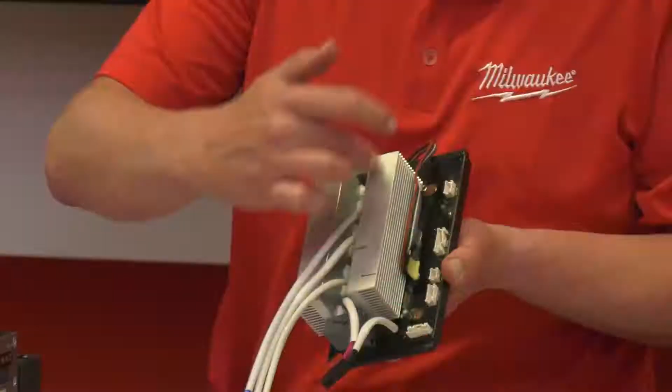And now we move a little bit from the battery to the tool, and this brings us direct to the REDLINK electronic. We remember, guys, there are really high currents flowing, and of course this could produce a lot of heat. In the worst case, a tool could overheat, but never ever an MX tool. The reason is we see the large heat sinks here, which cool the electronic down, and ensure we can drain the battery completely without overheating the tool.

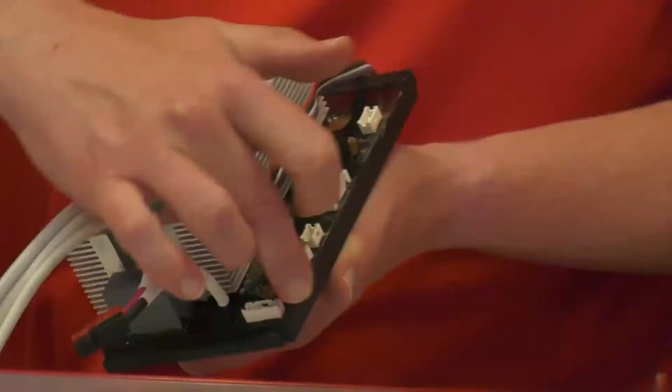Also, when we speak about job site conditions, we all know there's a lot of water and dust around, so we covered all the electronics again, making them dust and water protected. This is the REDLINK electronic like we use it in our tools.

And now we move to the heart of the tool, our Powerstate brushless motor. What I have here now is the frame of the motor, an 80mm frame, fully packed with copper.

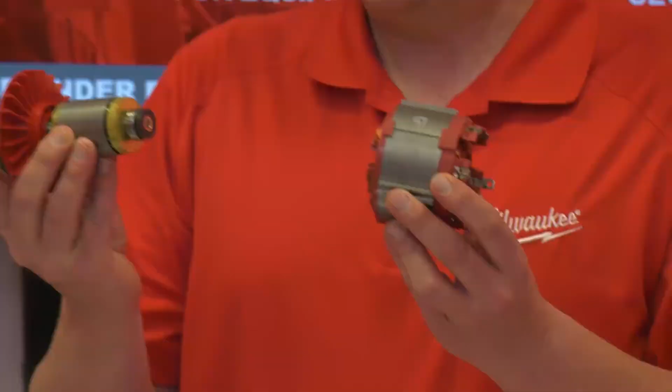And of course, on the other side we use a rotor, again fully packed with rare earth magnets. Putting them together, you can really see the power. Guys, this is the heart of our MX Fuel tools. And that was a quick overview on the technology in total.

I'd say, Thorsten, let's use the last couple of minutes we have left and go a little bit deeper into your questions. So let's make sure you don't come too close, you don't want to have any issues. Now I can kick you back. So now we're safe. You're in your technology corner, I have the tools, I'm happy. So we have some questions coming into the studio. I think Claude is reading them out, and then we try to answer them for you guys. Okay, I'll take the first one.

This comes from my friend Anwar in Saudi. Hi Anwar, hope you're doing well. The question is, does the coring machine have protection for water leakage in case of overhead drilling? For overhead drilling using water, we cover this with accessories to the stand. The stand will have a water collection ring, so when you drill upwards into the ceiling you'll have this water collection ring in place along with a vacuum to get all the water out. That's an accessory from the stand.

And yes, Anwar, these are all brushless tools. Thorsten, can the core drill use any cores on the market? Yes, as long as you have a 1 1/4 inch male reception or a 1/2 inch female reception, you can put any core on this machine. Nothing special there. We recommend our wide cores, developed together with a partner, to bring you the best performance from a cordless tool. But if you have existing cores, don't be afraid to use them, they are good to go.

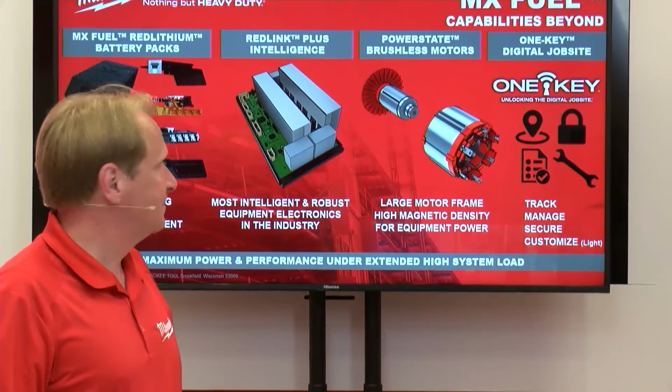Hey, Thorsten, where are you? I'm just keeping safety distance from you. So you push me away, I'm staying here. I'm staying safe, I don't get into this trap.